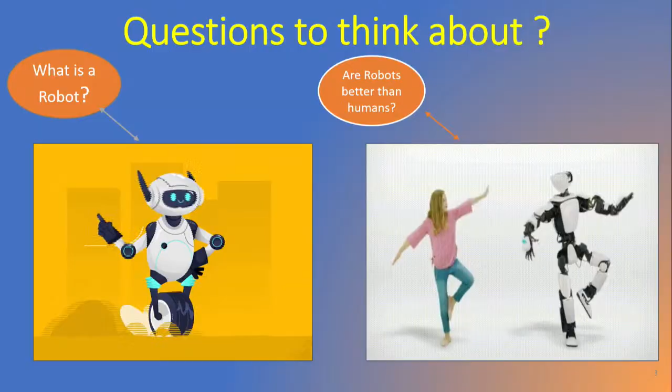So I will define robotics according to the ISO standard. It is a reprogrammable multifunctional manipulator designed to move material, parts, tools or specialized devices through variable programmed motion for the performance of a variety of tasks. This is actually the definition of a robot, because a robot is a manipulator which is used for various types of purpose.

Regarding the history of the robot, the term was coined by a Czech writer named Karel Čapek, who officially invented the term robot to describe fictional automata. He was a writer who wrote a book about robots, in which there was a character who was a fictional automaton.

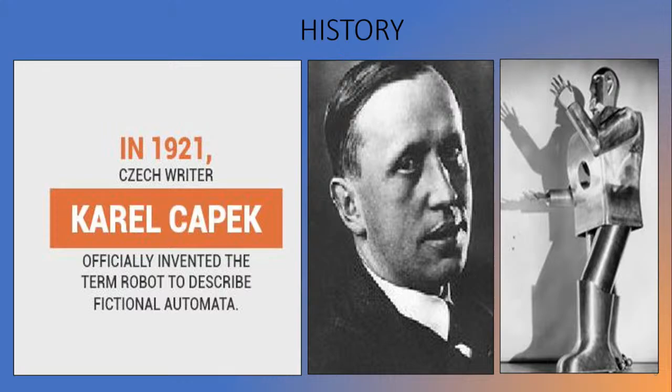Before going through what a robot is, its applications and configuration, I just want to tell you that 3 laws of robotics were made before making a robot. These 3 laws were essential for robotics to happen: a robot may not injure a human being or, through inaction, allow a human being to come to harm; a robot must obey orders given by human beings, keeping in view that it should not conflict with the first law. The first law says it should not injure a human. If someone gives an order to the robot to injure a human being, it should not conflict with the first law.

And the third law is a robot must protect its own existence as long as the first or second law is not violated. Now today's session is about robotics, and I think my audience is all from an engineering background. So you want to know where you can work and where you can find the aspects of your job.

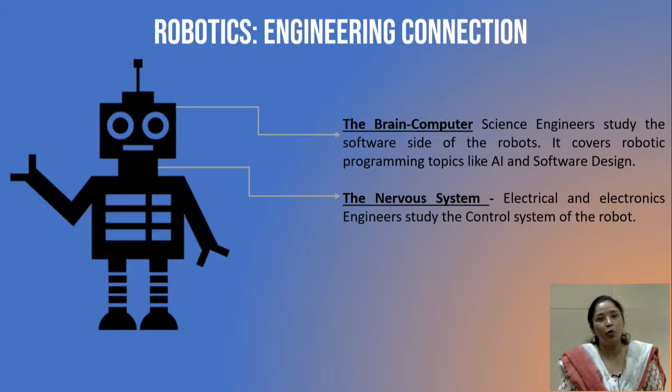The brain of the robot is handled by the computer engineering department, which studies the software side of the robot, develops algorithms, AI or software design. The second part is the nervous system. Like our nervous system, for connections in the whole robot, electrical as well as electronics study is required to control the robot.

The third one is the body. Since a robot is a mechanical body, a design of the robot should be made, and while designing, all the aspects like torque, kinematics and dynamics should be kept in mind.

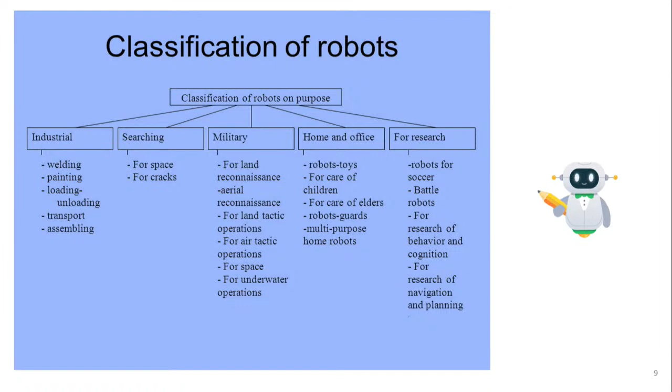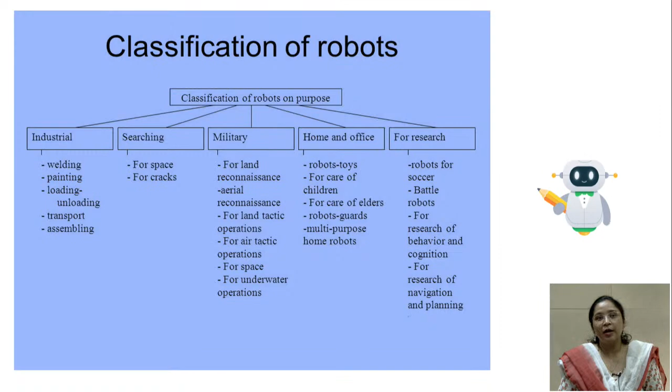Basically, robots are classified according to the work they do, according to the job assigned to them, like industrial robots used for welding, painting, loading, unloading, transport, searching robots, military robots, home and office robots, research robots. These robots are categorized according to the work area.

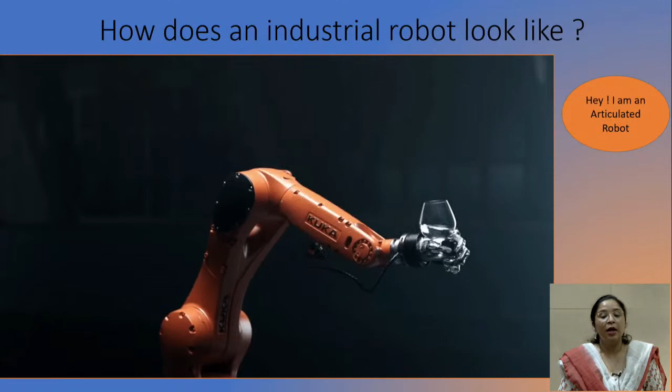Today my special session is about industrial robotics. This is an industrial robot, a special articulated robot used in industries mainly for assembling, painting and welding purposes. The next question may arise in your mind: how does an industrial robot perform various operations? That is a big thing. Apart from all these connections, how to operate a robot is a big thing.

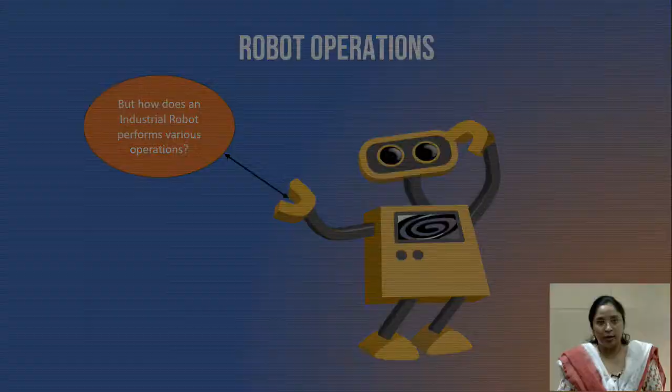Before going to that section, I want to clear the basics of robots, how they work, their joints. You all know a robot is made up of links and joints. So the main thing in a robot body is the joints. These are known as kinematic pairs according to their relative motion. Here you can see prismatic pair, revolute pair, screw pair, cylindrical, spherical and planar pair.

A prismatic pair is where two links have a sliding motion. Revolute, in which turning and revolving is involved. Screw, both turning and sliding is involved. A cylindrical pair provides single axis sliding motion as well as single axis rotation to two rigid bodies. Spherical, one link in the form of a sphere turns in the fixed link. These types of motions are obtained with the help of these kinds of joints.

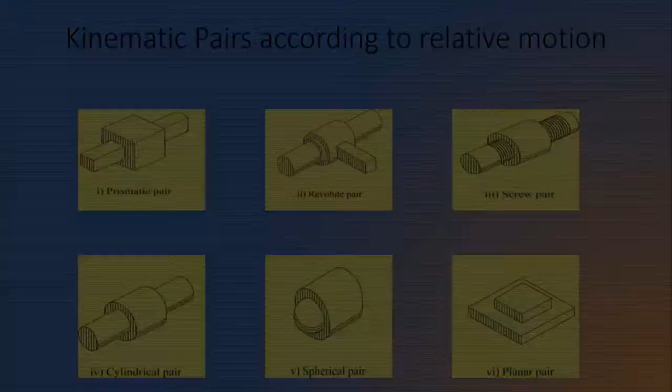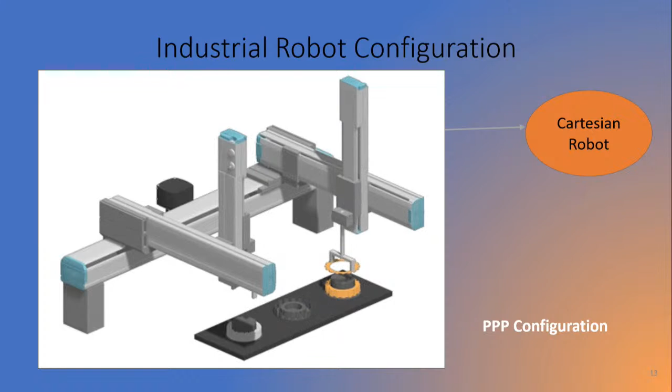Here you can see a Cartesian robot. It is also known as PPP configuration. PPP means all the joints in this type of robot are prismatic in nature.

The second robot is cylindrical robot. It is also known as RPP. That means one pair is revolute and two are prismatic joints. Third one is the spherical robot, which is of RRP configuration. Means two revolute joints are there and one prismatic joint is there.

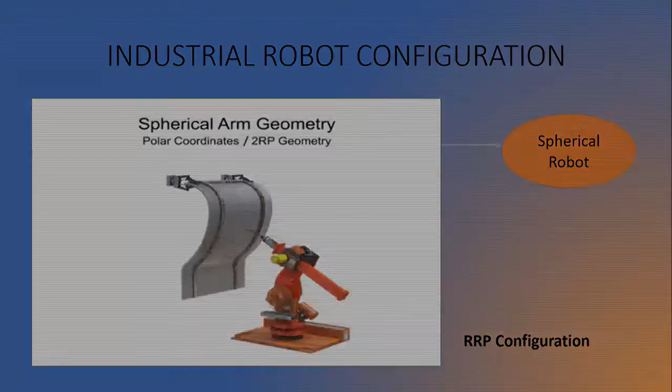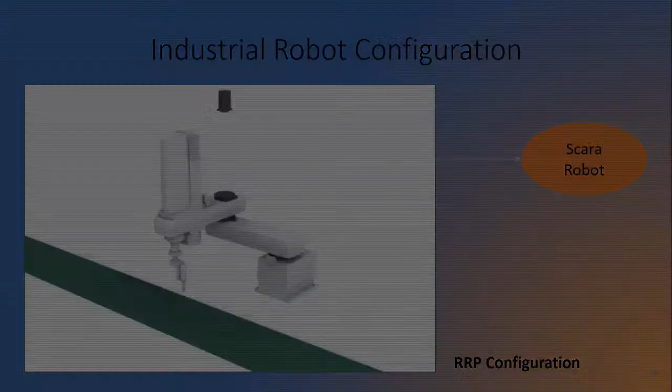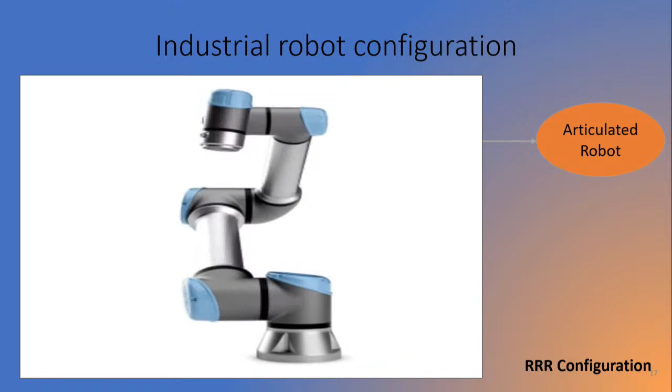Next one is SCARA robot. It is similar to the previous one, spherical robot, but the configuration, you can say the whole body structure, is different for both of them. And the last one is articulated robot. It is RRR configuration. All of these configurations depend upon the work envelope which they cover.

All these robots have a different work envelope. Work envelope is an area where a robot can work in a comfortable position. It is the area in which a robot can work. So articulated robot has a maximum working area, so it is preferred as an industrial robot.

Next is the robot system architecture. Here you can see that there is a manipulator which is attached to a robot controller and a teach pendant. There are force sensor and vision sensor. Now let's see how all these work. You can see all the computers have controllers. Robot too has a controller. This controller has similar aspects as a computer controller has.

It compiles all the data from the sensors which it has obtained, and according to it the manipulator may decide its positioning. There is a teach pendant here. Teach pendant is a device which is used to teach the robot different motions, the area which it has to cover, the line which it has to make. So it will cover the area according to the teach pendant.

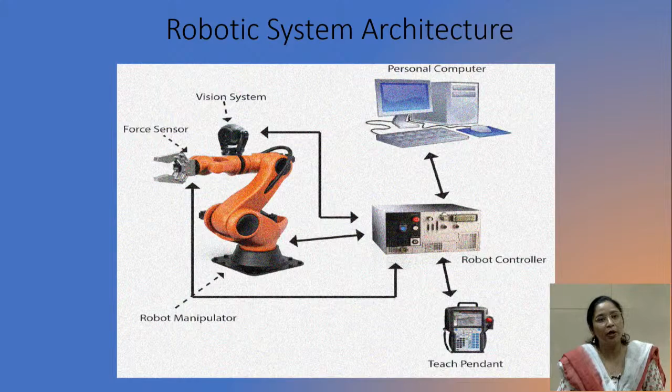Now I wanted to ask the audience, can we designate CNC as a robot? What do you see? Can CNC be a similar machine as a robot? Anything from the audience?

CNC actually is a machining machine, so it can do only one work. Like here you can see CNC milling machine, it can only do milling. But in case of a robot, we can do a variety of tasks as compared to CNC. You just have to change only the end effector of a robot and it will do the work which is assigned to it. Like for painting, we have a spraying gun. We can install a spraying gun on the end effector, so it will do painting.

So the difference between both of them is that one is for one purpose and the other one, robot, is for multiple purposes. This is the biggest advantage of using a robot. It can be used in multiple ways. There are many other good examples where robot can be used. Where precision is required, robot is the best option you have. Where reliability is required, robot is the best option. So robot basically is good for those purposes which require reliability, precision and variability also.

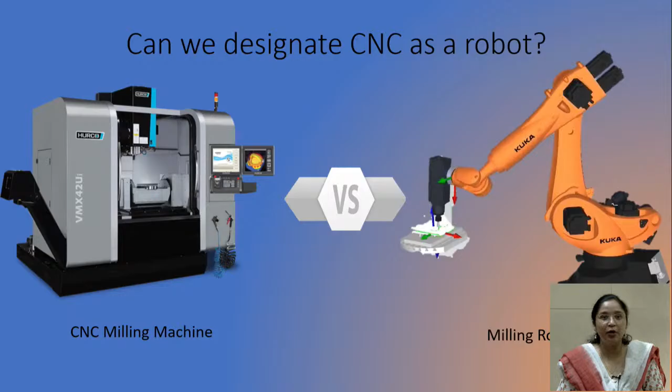Now I will come to my second content, which is application of industrial robot. Since my whole live session is basically inclined towards industrial robots, I want to discuss all the applications which an industrial robot can do. Like I told you earlier, we can do material handling, welding, painting, machining and assembly.

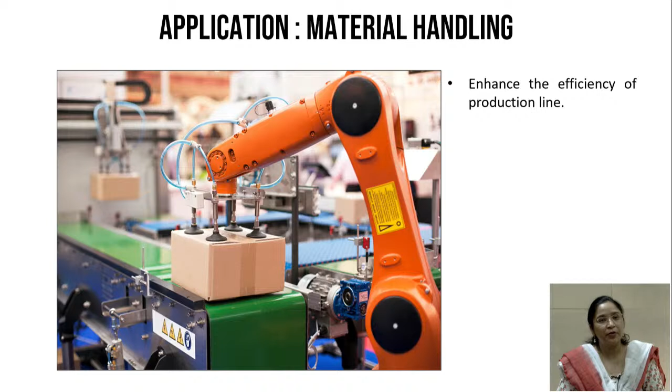Like this is a material handling robot. Here you can see only the end effector has been changed and a vacuum gripper is installed on the end effector, and it can place the object from one place to another. The advantage of this type of robot is it enhances the efficiency of the production line. It automates the tedious, dull and unsafe tasks. Pick and place, machine loading and unloading are some of its best applications.

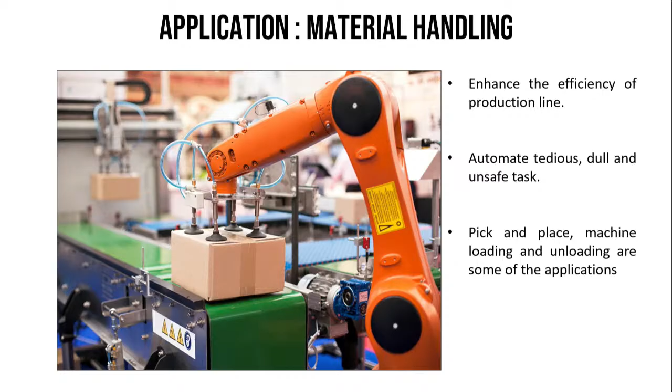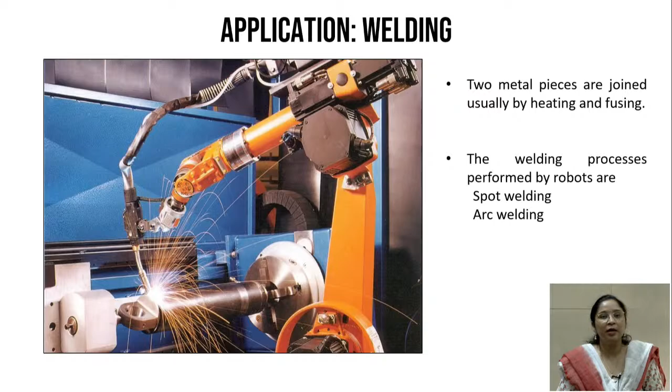The second application of robot is welding. You all know what welding is. It is joining of two metal pieces by heating and fusing. Robot is ideal for this purpose because it is very unsafe to do welding with the naked eyes, so it is best that welding is done by a robot, and it creates a very fine weld as compared to the manual one.

The next example is of spray painting. If you want a finish in your work, then spray painting should be done with the help of a robot.

Normally they are used by the vehicle manufacturers, which want detailed work in a consistent and systematic way. It is also used by the aerospace and defense sectors, since its finishing is very good as compared to the other painting jobs.

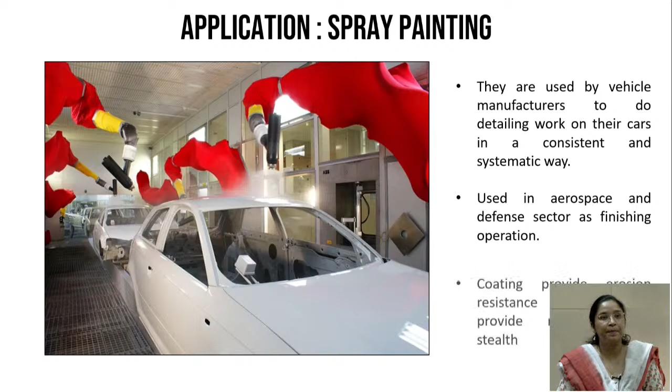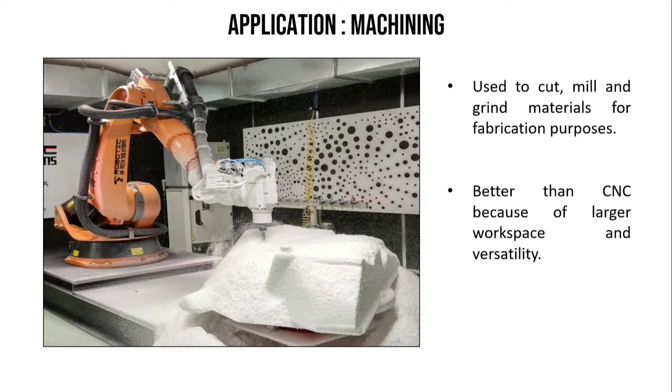The next application is machining. We have many traditional machines available with us, like CNC or a lathe machine, but with the help of a robot we can also do machining. We can cut, mill, grind, or use it for fabrication purposes. It is better than CNC because a larger workspace and versatility are available.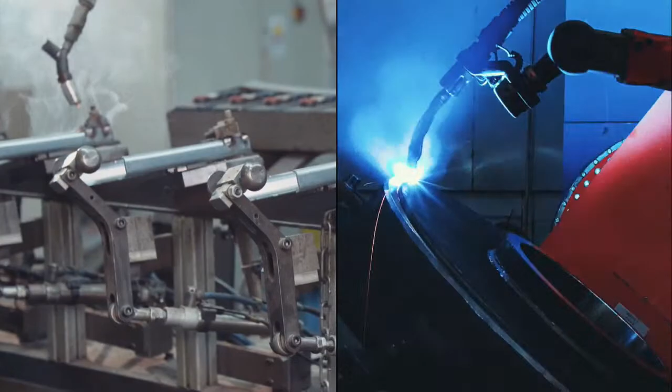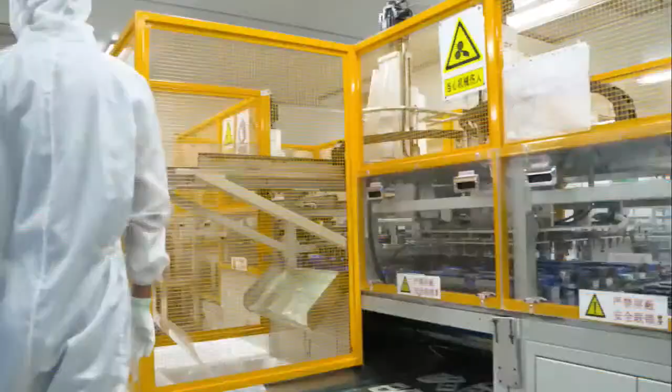Now I want to show you one video which will give us a glimpse of the other applications which are handled by a robot. Like I stated earlier, spot welding and arc welding, pick and place, material handling, these are some of the biggest areas which are being covered by the robots.

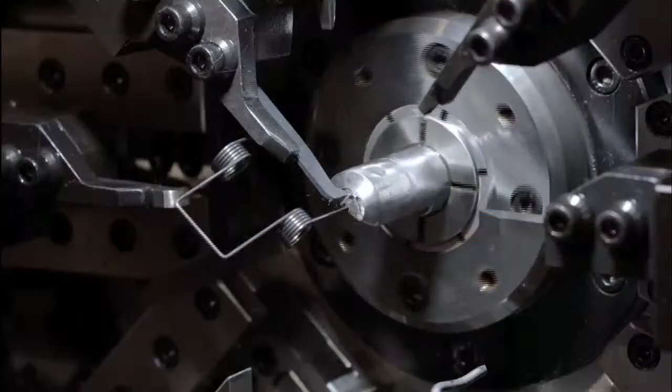You can see an assembly line. Robots are basically used in automation industries, where fully automated plants of automobiles are there. So robotics is being widely used over there, especially in the automobile industry. These are some other applications which are being covered by robots.

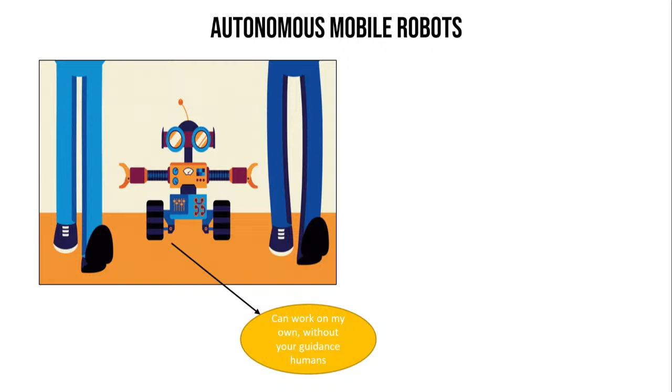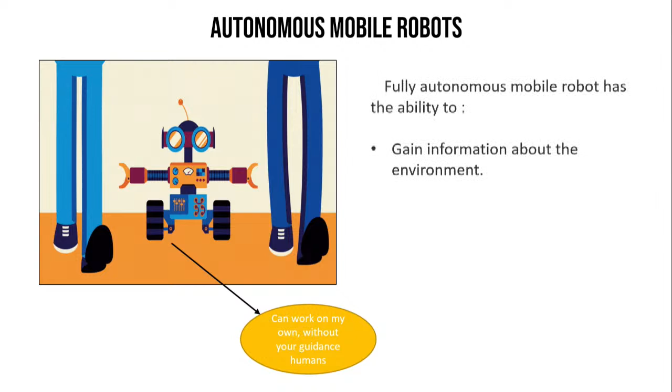The next part of my slide is autonomous robots. It's a very big area of interest nowadays; people want to know about the autonomous robot. Can anyone from the audience tell me what an autonomous robot is? Yeah, actually an autonomous robot is a robot which can do any work by itself, without any guidance or intervention of a human being. A fully autonomous robot gathers information from the environment and acts accordingly without human intervention.

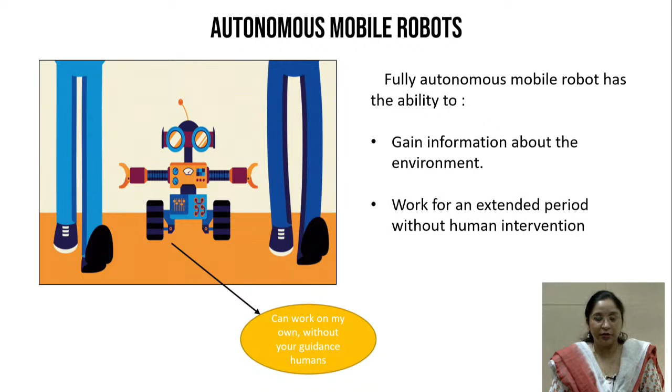This is how an autonomous robot works. It perceives the environment; it takes feedback from the whole environment. Here we can see that there are three blocks which the robot has to cross, and it is perceiving the environment, and after that it takes the decision which path it has to follow, and the last one is actuation. It follows the path without any hindrance. This is the actual work of an autonomous robot.

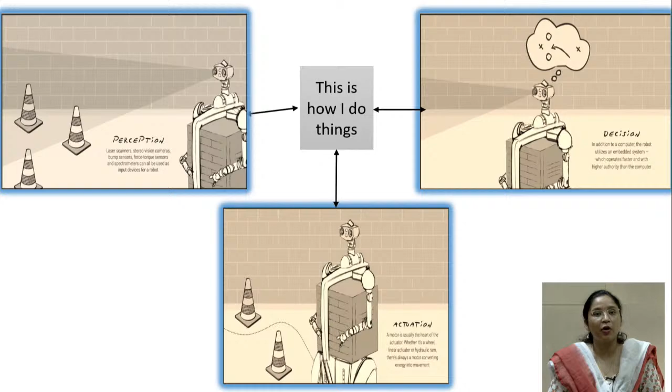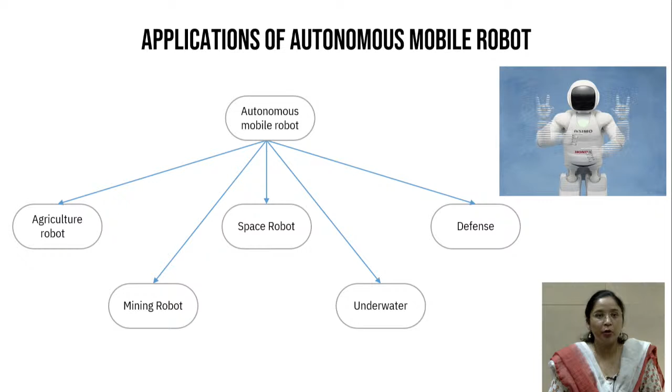What are the applications of autonomous robots? Like industrial robots, autonomous robots have many applications nowadays. You all have seen Sophia, the AI-based robot, and it is one of the first robots which has got citizenship because of its AI. Coming back to our autonomous mobile robots, there are many aspects of it, like agriculture robots, mining robots, space robots, underwater robots, and they are also used in defense.

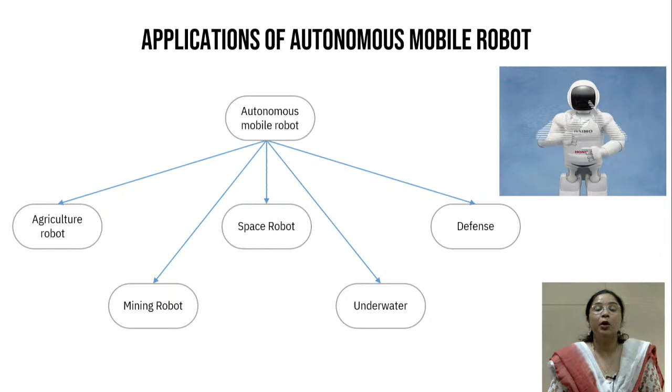Agriculture robots are used in agriculture mainly for picking out the weeds, planting seeds, harvesting, environment monitoring and soil analysis. There is so much research that has been done in this field so that cultivation can be improved.

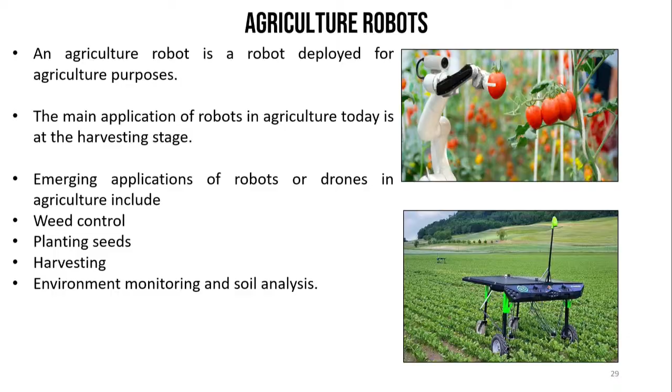The next one is the mining robot, which is mainly used for excavation purposes. If mounted with suitable sensors, it can also be used for detecting gases and minerals, and it also helps the miners to work safely and efficiently.

Space robots. It's cheaper to send a robot to space rather than an actual person, since a robot is a safer option as compared to sending a human to space. Robots can work tirelessly, they can work in any environment, they don't need to eat or sleep; they can work without any hindrance.

So they can collect information about life, minerals, and soil conditions according to the sensors which are mounted on them. And also, like the NASA Perseverance robot which has been sent to Mars, it can withstand very high temperatures and high radiation.

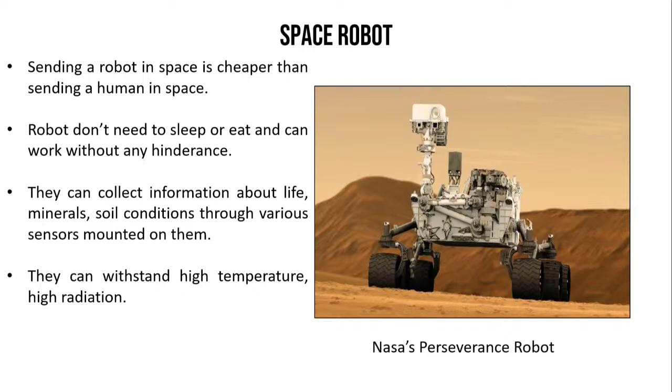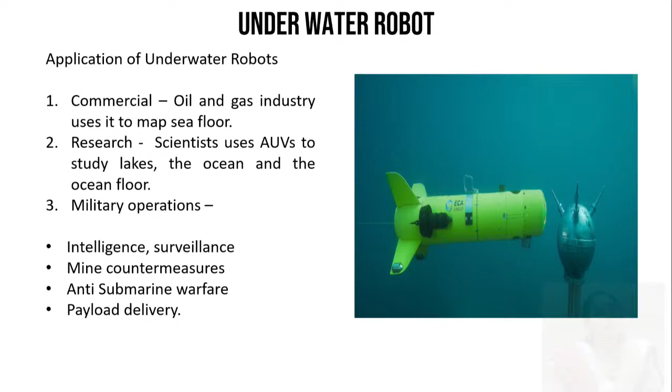Next one is the underwater robot. Applications are basically commercial, for looking out for oil and gas, so that they can map the sea floors and find out where there is an abundance of oil and gas minerals. It can be used for research, and for military operations like intelligence, surveillance, anti-submarine warfare, and payload delivery. There are many applications of such underwater robots.

The next one is our defense robot. They are intended to enhance soldiers' existing capabilities while keeping them away from any sort of harm. We can use drones to strike missiles in enemy territory. They can also be used as bomb defusers. So you can see how robots can be used in places where humans are not safe; robots can withstand all types of harmful effects.

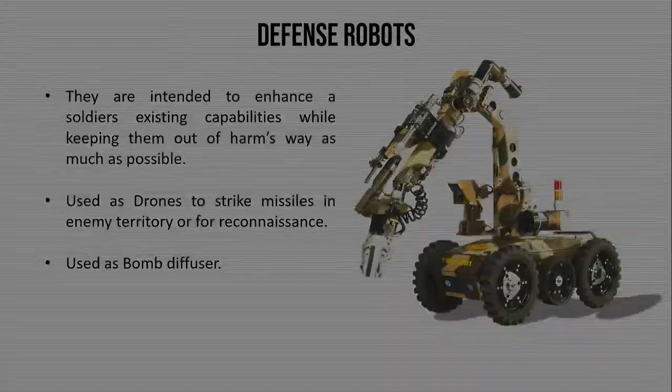Now, why should we go for robotics? Why? Do you think there is any link between Industry 4.0 and robotics? Any link? Anyone?

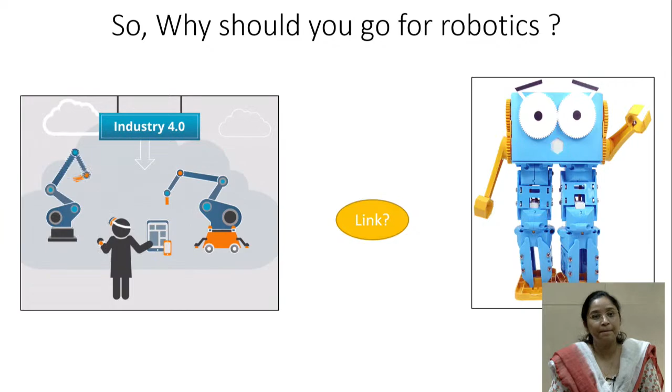For this to understand, we have to go through the 4 industrial revolutions that have happened till date. In 1784, the first industrial revolution happened, with mechanization and the steam engine, the first form of power which a human has encountered. In 1870, we have assembly lines, mass production, and electrical energy. In Industry 3, automation, computers and electronics were there. In Industry 4, we have cyber physical systems, Internet of Things and networks.

And what is a cyber physical system? A cyber physical system is a computer system which is controlled by a computer algorithm. That means a computer is controlling a computer. That is a big thing. And Internet of Things, as you all know, is a fancy word nowadays. It describes the network of physical objects that are embedded with sensors, software and other technologies to connect and exchange data with devices and systems over the internet.

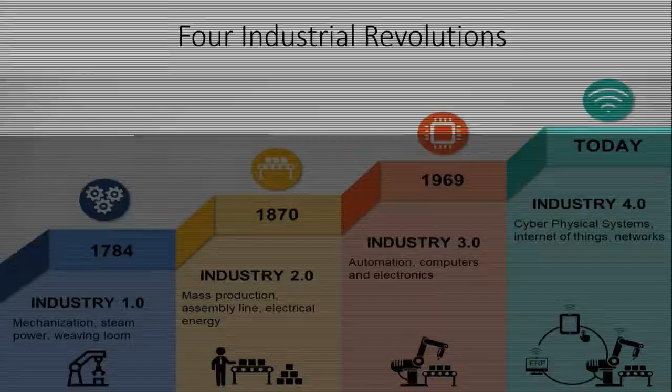So you can see Industry 4 is a key. All these technologies are interconnected with each other: cyber security, cloud computing, mobile technologies, machine to machine, 3D printing, advanced robotics, big data analysis. So these all things are connected. That's why advanced robotics and robotics is the need of the hour.

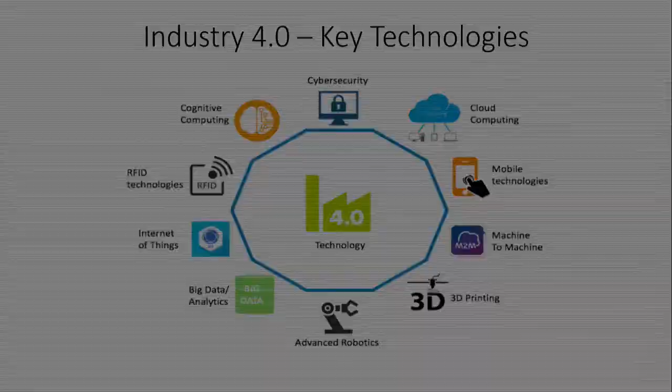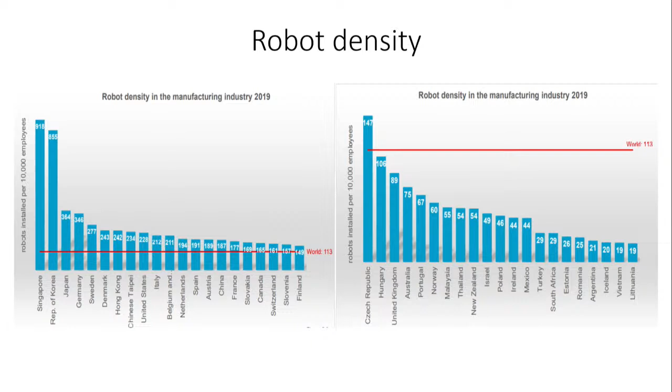Next, here you can see the robot density; that data is from 2019. You can see the number of robots installed per 10,000 employees. Here you can see Singapore has the highest number. That's why it is one of the most developed countries in the world. This data has all the prominent countries in it, and you can see all the countries are now going towards robotics. So it is a need of the hour. Now it is not a choice, it is a mandate. You have to opt for robotics to keep up with the changing industrial needs. So robotics is the answer to it.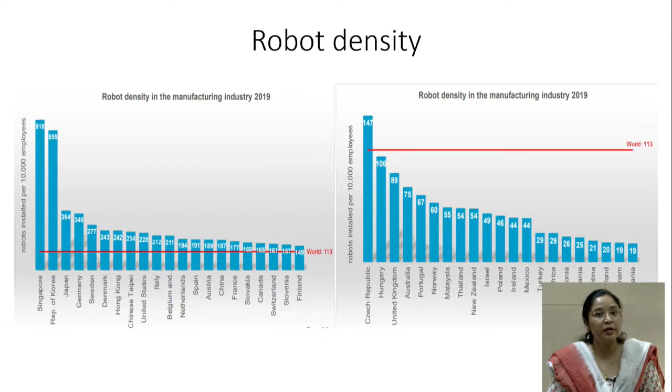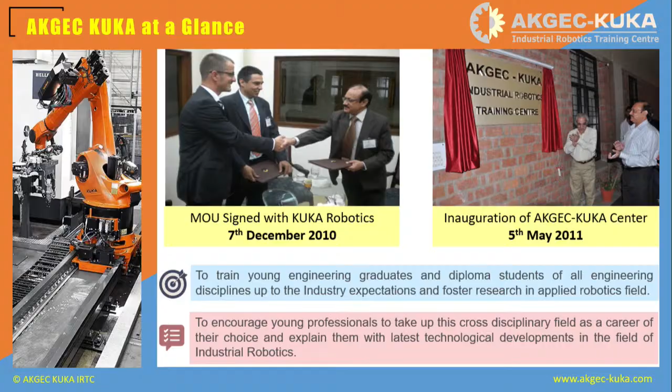I have told you enough about what robotics is, its classification and applications. Right now I want to discuss with you all regarding AKGEC KUKA. Just a glance: AKGEC KUKA signed its MOU on 7th of December 2010 with KUKA, and on 5th of May 2011 its center was inaugurated. Right now we have a wide variety of training programs, workshops, ITPs, and on-site training available with us. We also provide basic, advanced and expert level training programs to all the engineers. And this is the certificate which is issued by KUKA Germany. This certificate can be used worldwide. It is accepted worldwide.

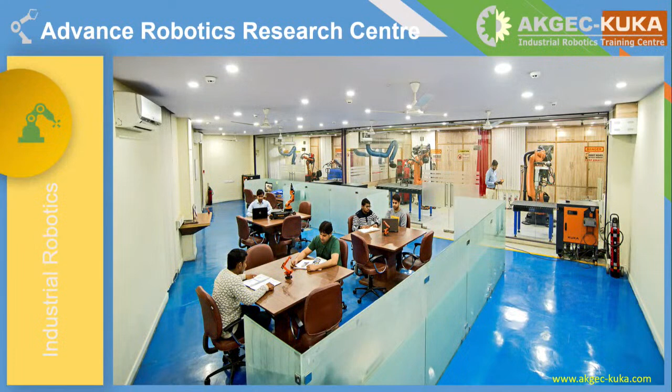These are some of the glimpses of the state of the art infrastructure which is available with us. This is our basic robotics lab. This is our advanced research lab, where robots with payload capacity up to 150, the KR 150, are available with us. These are the training rooms. We actually prefer quality over quantity, so we have only a batch size of 12 to train. We don't take many students for training purposes. This is a standard robotics cell. These are all KR3 and KR6 robots which are available with us.

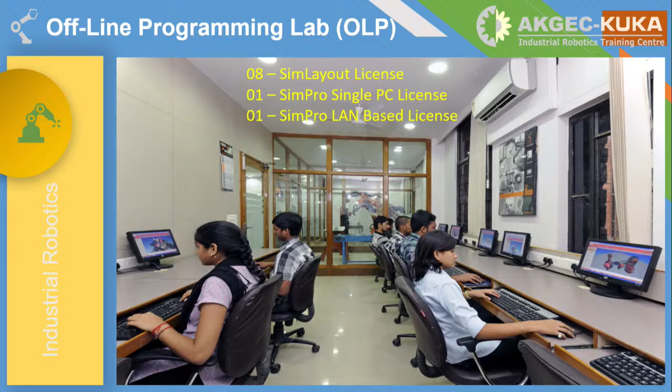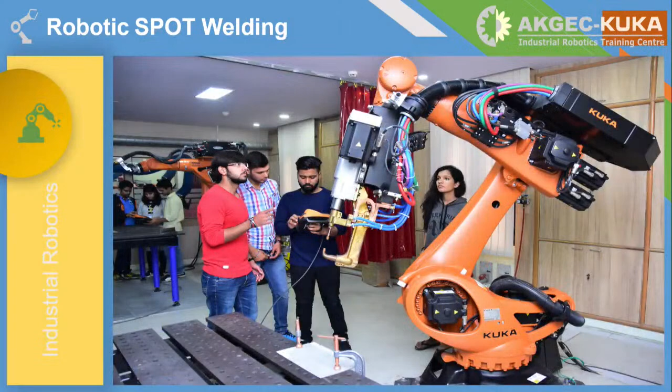This is robotic MIG welding. An offline programming lab is also available with us. We have 8 SimLayout licenses, 1 SimPro single PC license and 1 SimPro LAN based license. We also do consultancy with the help of these SimLayout licenses. We also have a mobile robot with vacuum handling, robotic spot welding, robotic TimeTwin welding, robotic TPS/i MIG welding, CMT welding, and ultrasonic welding. Here you can see there is a wide variety of infrastructure available with us. There is no other center like AKGEC KUKA in the Noida, Delhi NCR region; we have all the facilities available with us.

In the end, I want to conclude that Industry 4 is focused on integrating all the technologies on one platform. Robotics will play a very important role in converting the present manufacturing system into an intelligent manufacturing system. New startups are coming up where autonomous robots are being used, and India is yet to be impacted by it. Make in India is gaining momentum and foreign direct investment is increasing day by day. Many industries are now investing in automatic robot technologies. So job opportunities in this sector are bound to increase. That is one of the reasons I want to assure you all that being in this field, you have ample job opportunities.

So whether you are a mechanical, electrical or computer science engineer, it is not a restriction that you have to go into your respective fields only. Nowadays we are doing hybrid engineering; we have to be multidisciplinary. So I request all the students who are watching this session to opt for robotics.